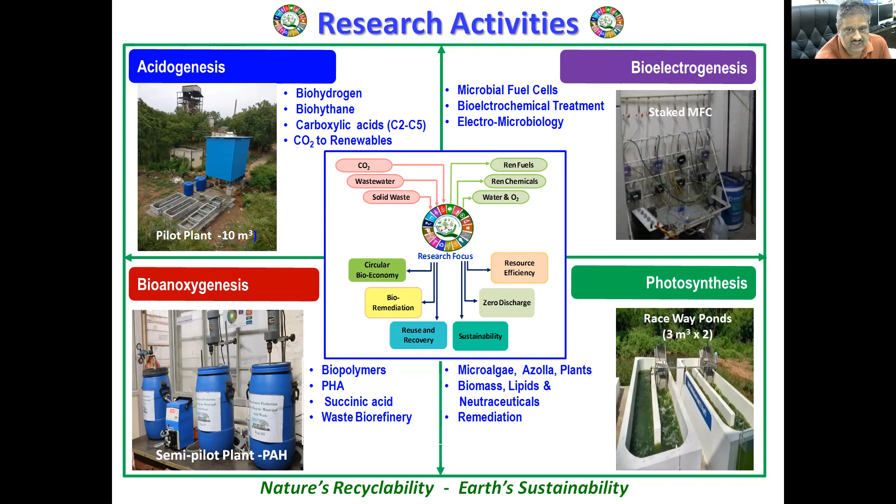Starting with some of the critical issues with respect to linear economy, that is fossil-based linear economy, I would like to show some figures. We are highly dependent on fossil resources for our energy requirement as well as for our material requirement. Whatever material is used right now is also mostly sourced from fossil-based resources.

When we look into the domestic material consumption as per 2010 figures, about 40 billion tons per year is being used, which accounts for 5 to 27 tons per person per year in a linear economy mode. By 2050, the population will increase to 10 billion from 7.8 billion right now, wherein India contributes 18% of the global population. We'll have domestic material consumption estimated between 90 to 180 billion tons per year, accounting for 8 to 17 tons per person per year.

So there's a great demand for resources, but resources are finite in nature. If we continue to live and produce like today, by 2050 we will need 3 times more resources, 50% more fuel, 70% more food, feed and fiber, as well as 50% more water.

Adding to this, 70% of the population lives in cities. Urban cities are responsible for 80% of GDP, even though they take up only 2% of the global area. But 70% of the population will live there by 2050, which is a critical issue, accounting for 75% of natural resource consumption and responsible for 70% of global carbon emissions, which is very critical.

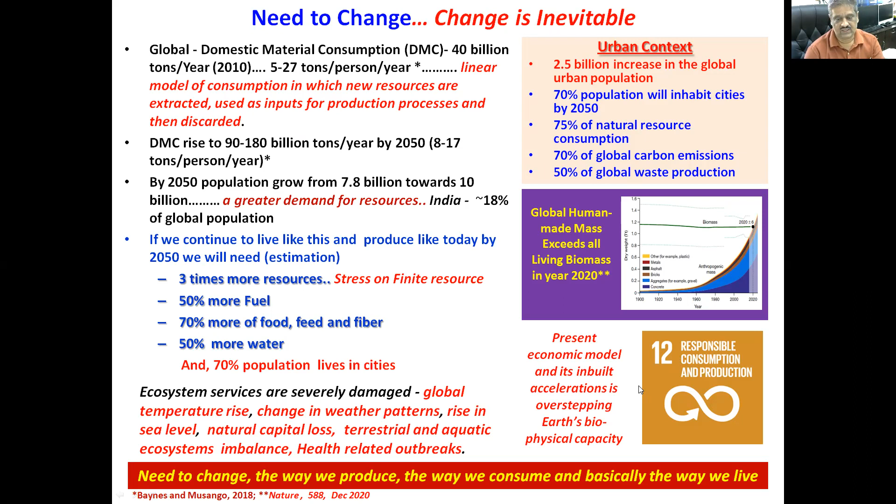Recently in Nature, they published a critical finding: global human-made mass exceeded all living biomass in the 6th month of 2020, which is very critical and disturbs ecological balance as well as ecological services significantly. This tells us that we have to move towards something sustainable, with resources managed in a sustainable way, which Sustainable Development Goal 12 describes as responsible consumption and production.

So here I would like to mention again that we are in a linear economy, which is a cradle-to-grave approach, a very industrial extractive model we've been practicing for the past 200 years: take, make, use, and dispose. According to estimates in the European Union, per capita use is about 15 tons of resources per year, of which 5 tons becomes waste, and 60% of that goes to landfills.

This shows that waste still has resources to be used, but we are throwing it away. It's a very significant issue, so we have to move towards sustainability.

So transition from linear to circular economy is a very significant way to approach the self-regenerative capacity of Mother Earth, so that ecological services can be retained.

It's a kind of cradle-to-cradle model, wherein material which we take from Mother Earth will be used in a process, and after its utility, the waste, as we call it right now, will become a resource for other processes. This way we can increase resource recovery efficiency and reduce material loss in the system.

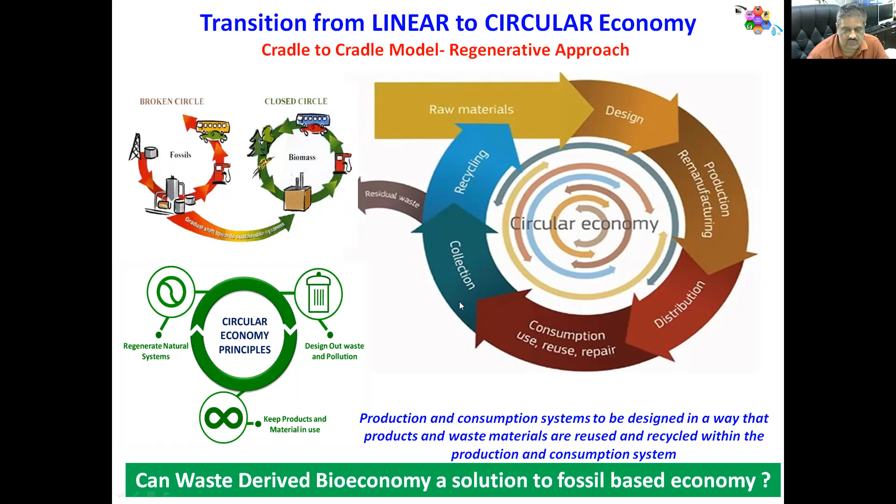So the goal is to maximize materials in the circular loop, reduce the loss, so that we depend less on fossil-based materials. This approach is coming up in a significant way. Here I would like to say that bio-based economy, particularly with respect to the circular loop approach, is very significant, because a regenerative natural system is very critical.

When we are trying to regenerate resources, very much similar to what nature is doing, it will have a regenerative capacity. So a circular regenerative approach is the order of the day, and it's one of the sustainable approaches.

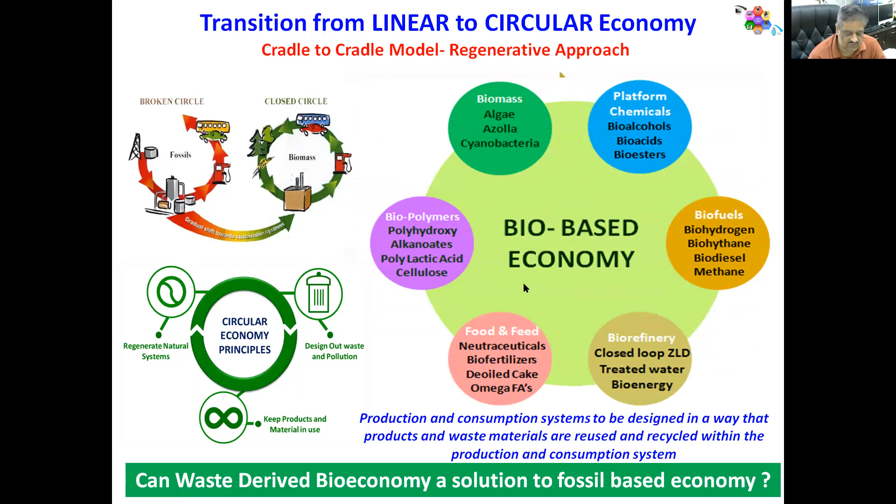When we talk about circular economy, waste is one of the important feedstocks. In India, we have significant amounts of waste, starting from municipal solid waste, sewage, fecal sludge, as well as industrial wastewater, which have inherent potential for energy generation, as well as potential to recover resources in the form of organic nutrients, chemicals, or many other things.

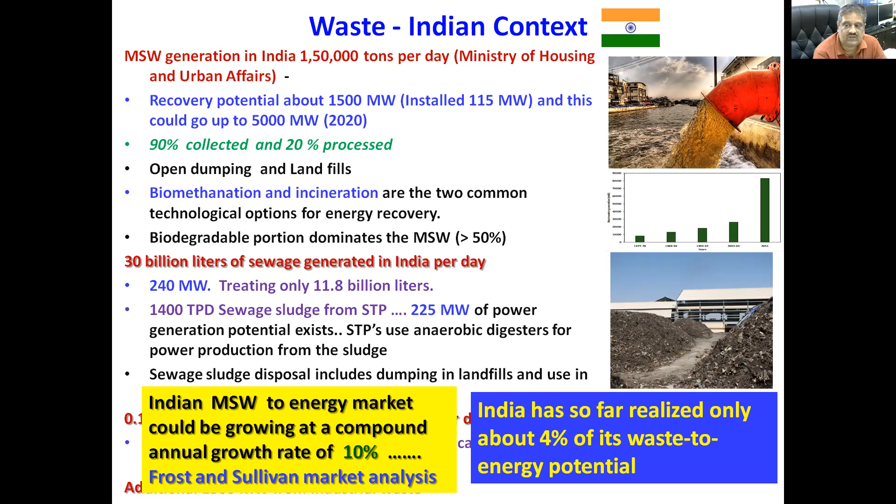However, at present we are only using 4% of the waste-to-energy potential. But according to estimates, there's about a 10% annual increment in municipal solid waste generation, which is very significant with respect to resource availability for sector-based bioeconomy.

So let me put forward some of the processes and some of the wastes which can be used by biological processes to convert into different products with different applications, which also accounts for waste remediation. This includes domestic wastewater, industrial wastewater, solid waste, as well as CO2.

CO2 can be used as a feedstock for biological processes, starting from anaerobic digestion, which is a mature process, to acidogenic fermentation. Likewise, many processes are available which need to be used to produce required materials that will have significant applications. This shows that circular approach as well as bioeconomy is very critical in order to recover resources from waste in a sustainable way.

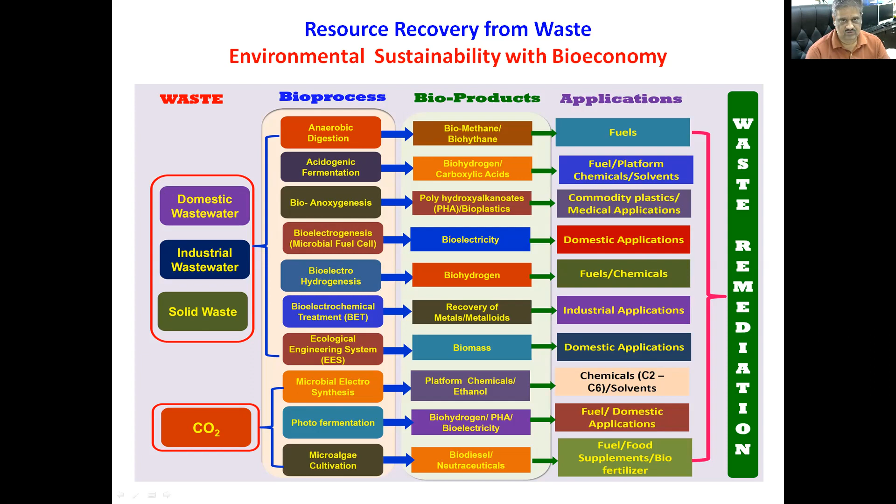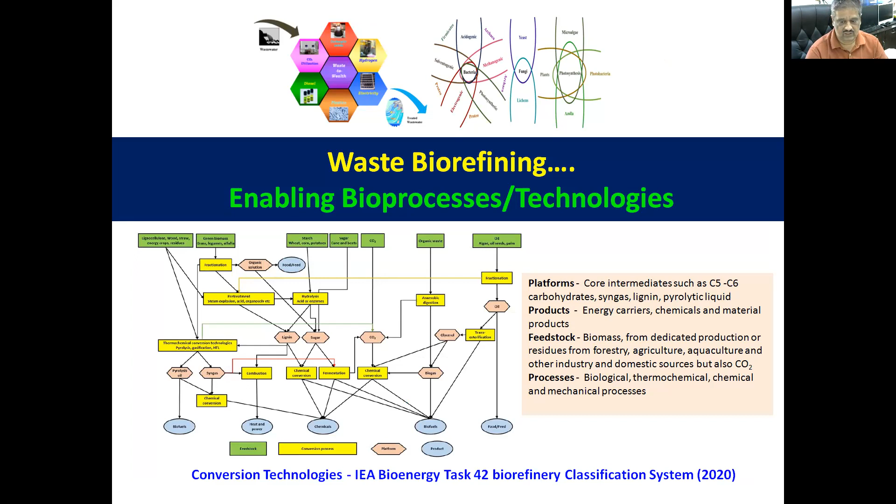For that to happen, we require system-enabling processes or technologies. I would like to call this waste biorefining process, in order to make this feasible and more of a reality.

Here I would like to mention again about the anaerobic microbiome, which is a very versatile biofactory, wherein when we give carbon in the form of six-carbon glucose, you can see the metabolic routes going towards different products, starting with methane, which is a mature and easy process, to hydrogen, plastics, lipids, lactic acid. It's a very versatile platform, and we can tweak the metabolic activity towards the requirement of the materials we anticipate.

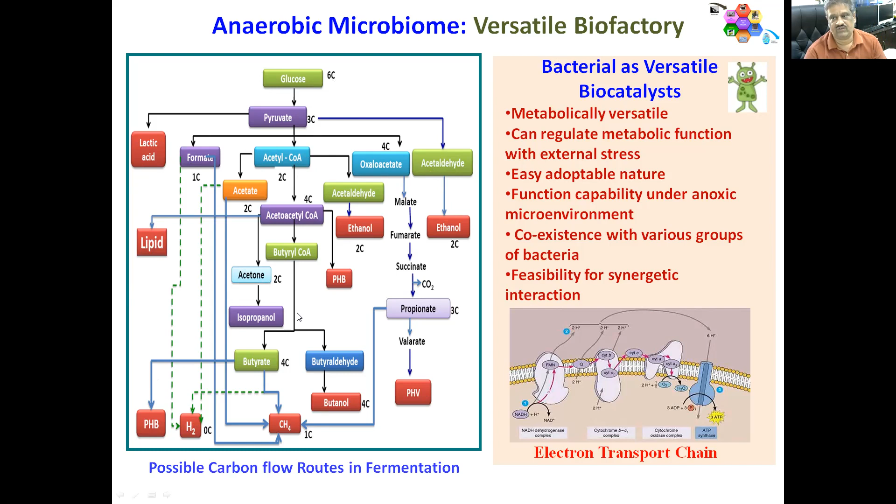So one important process I'd like to mention is dark fermentation, which is able to produce hydrogen as a terminal end product. Hydrogen production by dark fermentation using waste is considered to be a low-carbon as well as green process. Everybody knows that hydrogen is a unique clean energy source which will not generate any kind of emissions.

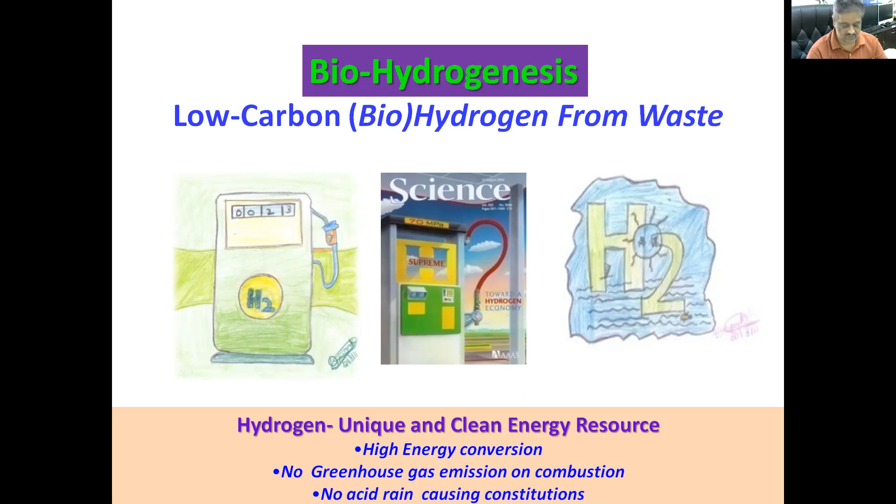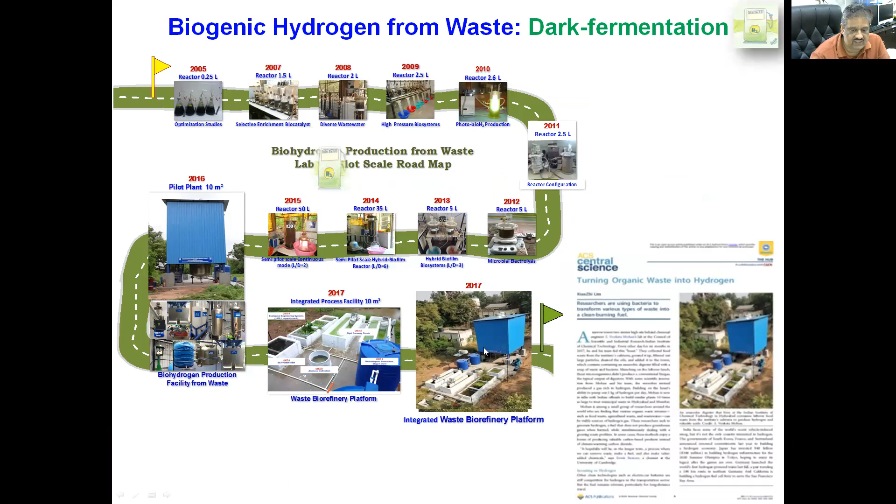In 2005, we started working on hydrogen production by taking waste as a feedstock. In 2016, we were able to set up a pilot plant with funding from MNRE, and then we were able to make a waste biorefinery facility integrating hydrogen to maximize resource recovery with funding from CSIR.

Hydrogen production is very much similar to the methanogenesis process, wherein four steps are involved. But in hydrogen production, we have to terminate the last step, where hydrogen and acetate along with CO2 would otherwise be converted to methane. So stopping the final methanogenic process and making hydrogen the terminal end product is the basic scope of dark fermentation towards hydrogen production.

In this process, 1 mole of glucose can produce about 2 moles of acetic acid, apart from 4 moles of hydrogen. And in the butyric acid pathway, with 1 mole we can produce 2 moles of hydrogen.

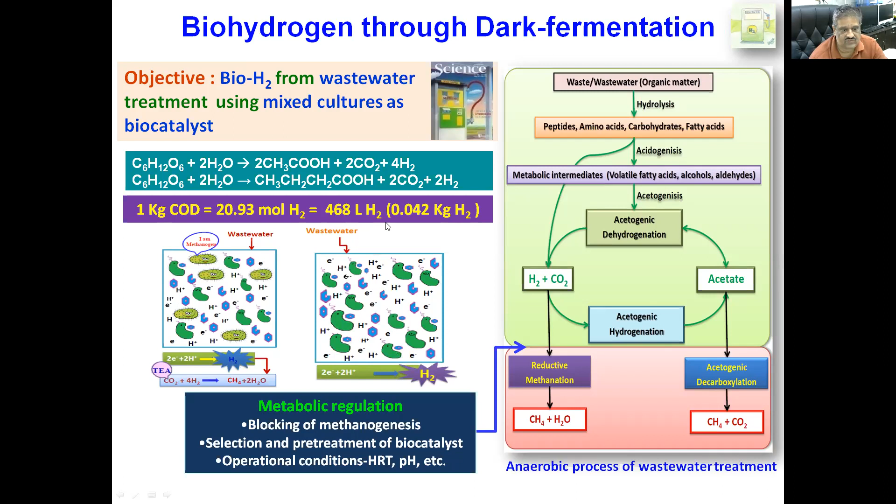When we account for waste, 1 kg of COD, if removed via the acetic acid pathway, can produce about 468 liters of hydrogen. We studied different wastewaters and were able to produce good amounts of hydrogen, apart from very good COD removal efficiency.

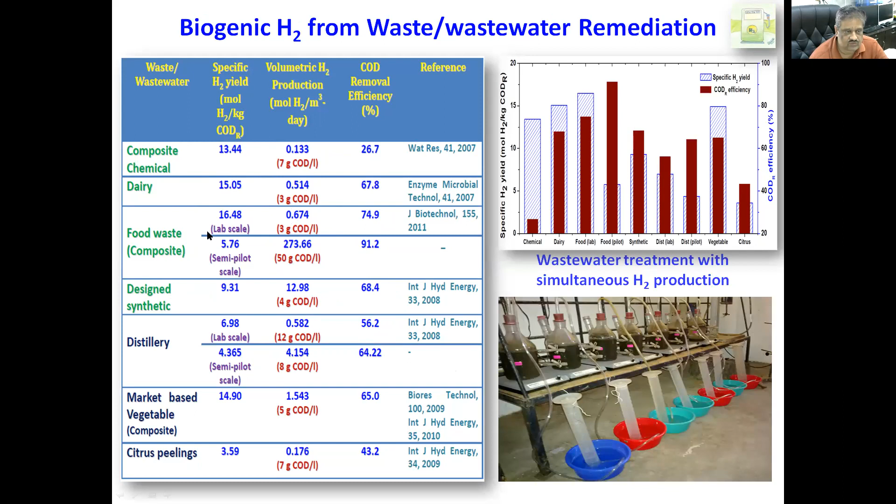But hydrogen production efficiency varies based on wastewater composition, organic loading rate, and biodegradable nature. However, when we look into hydrogen production during scaling up, we observed there are some inherent limitations or challenges which we need to address.

The basic one is with reference to the biocatalyst. When we are using a mixed culture, there will always be a possibility of methane production because methanogenic bacteria are present. So that's a critical issue while scaling up the process.

Apart from that, the feedstock composition, biodegradability, carbon load, and availability play a major role. There's also process inhibition, which happens due to the formation of fatty acids that give feedback inhibition, and this acidic redox condition will reduce process efficiency.

The other major issue is that the outlet from the hydrogen reactor has rich acids, which will be a critical issue if we are not treating it before disposing of it. So resource recovery is a major consideration here.

These are the critical issues we try to solve before scaling up our process to pilot scale. The major thing is with respect to selective enrichment of acidogenic bacteria, which is one of the critical things to produce hydrogen as a final product.

For this, we try to use some classical microbial techniques wherein the spore-forming bacteria, which is nothing but acidogenic bacteria that can produce hydrogen, can be made to sporulate by giving shocks such as acid shock, alkaline shock, or heat shock. But methanogenic bacteria, which are non-spore-forming, can be eliminated by giving these shocks.

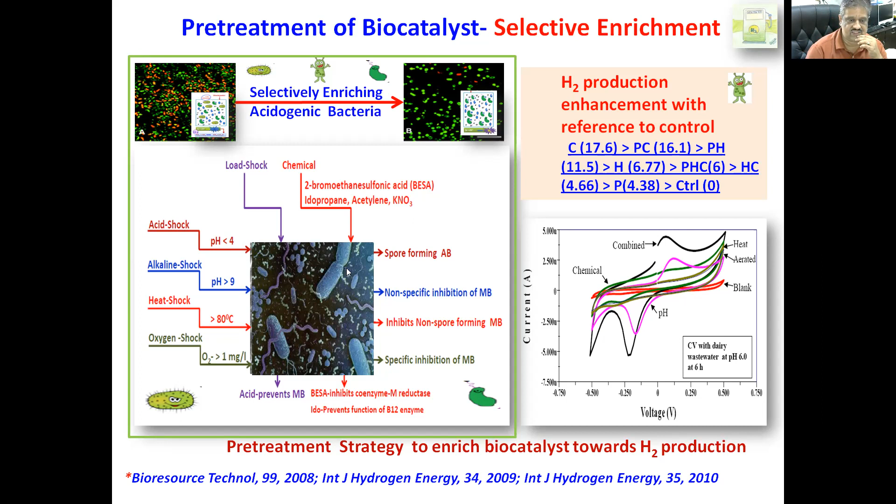This has helped us, and we tried to optimize this for almost 1 year in different reactors using different pretreatment methods. At the end of 1 year, we observed that all the systems had shown enrichment of acidogenic bacteria, particularly firmicutes, which are hydrogen producing bacteria.

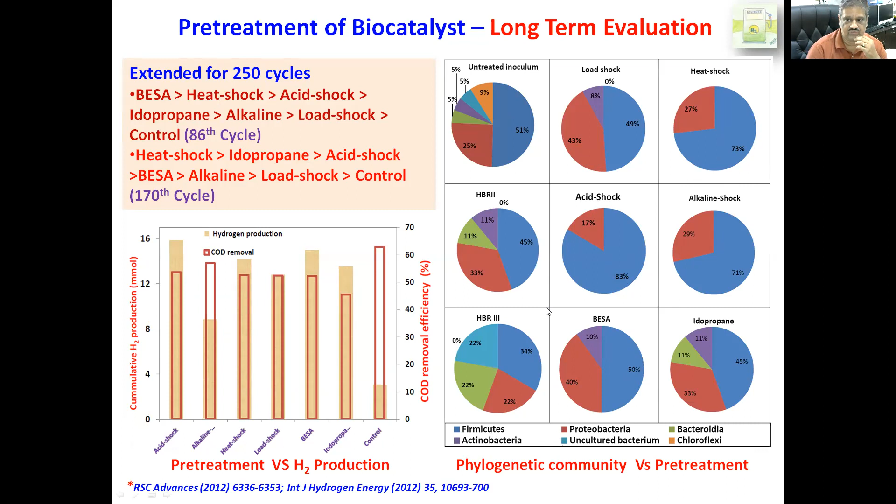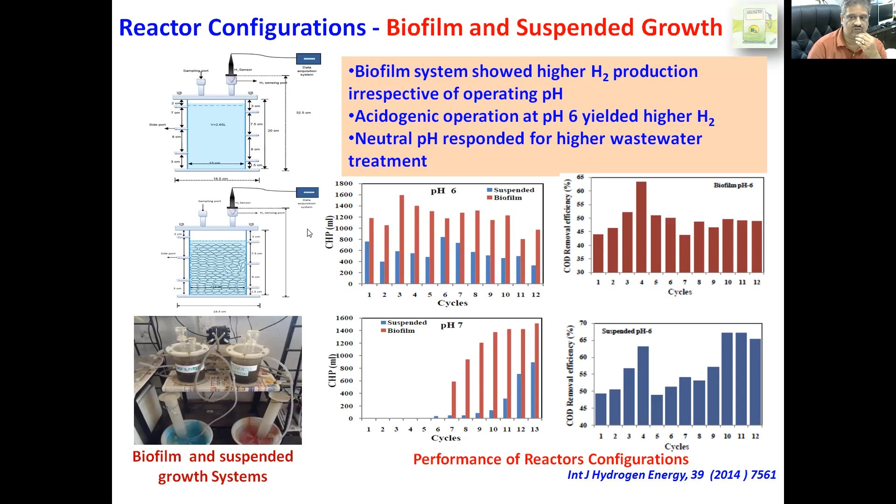So then we tried to optimize reactor configuration, but particularly suspended growth systems are not feasible for hydrogen production. However, biofilm systems are robust and can sustain the attachment of acidogenic bacteria in the form of biofilm, so that has shown higher hydrogen production.

Apart from that, the more the organic loading rate, the more the hydrogen production. So we tried to study the functional role of organic concentration of wastewater, and observed that up to 50 grams of COD per liter, hydrogen production increased significantly, but dropped subsequently because of a drop in pH.

So then we tried to regulate the system buffering capacity using some classic and known techniques such as inorganic ions and feed replacement strategy, apart from CO2 sparging. This helped us, and this is the diversity which we have studied for almost 6 years.

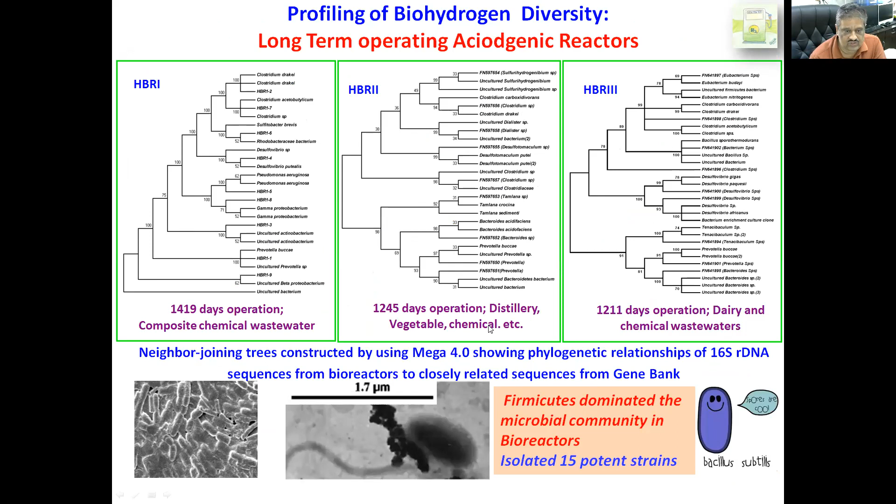At the end of that time, we observed that all the different reactors had shown enrichment of firmicutes, which are known hydrogen bacteria. These are the different bioreactors which we used to scale up the system and optimize parameters, particularly for dark fermentation towards production of hydrogen, wherein biocatalyst enrichment is very critical.

Acidic pH is more favorable for hydrogen production rather than methane, and the less the retention time, the more the hydrogen production, with no need to enhance the growth of methanogenic bacteria. Batch systems are more feasible towards higher hydrogen production, and biofilm configurations are very specifically required for robust acidogenic bacteria.

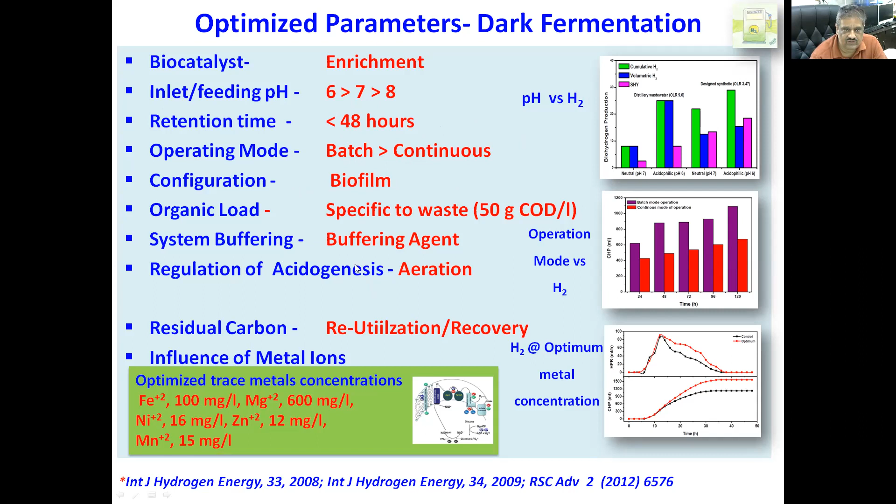Like that, we tried to optimize different conditions in order to maximize hydrogen production. Apart from that, with the funding of MNRE, we tried to develop a pilot plant with 10 meter cube capacity with all accessories that can selectively enrich the bacteria and pre-treat the solid waste if we are using it.

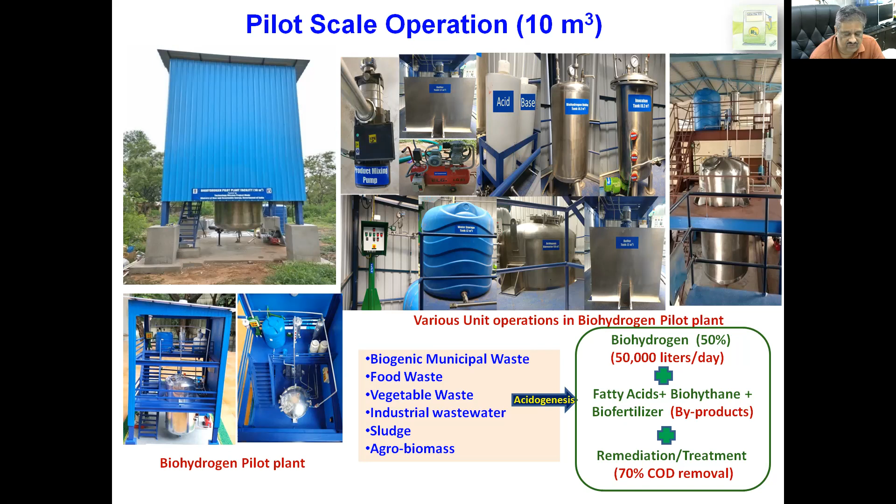So then, using municipal waste, particularly food waste, we tried to produce about 50,000 liters of hydrogen per day with 50% conversion efficiency by giving 50 grams of COD per liter.

So this is the unit cost of hydrogen per kg. At pilot scale, it's about 240, but at 100 meter cube capacity of reactor volume, it will be near 150, which is very much near to the market value.

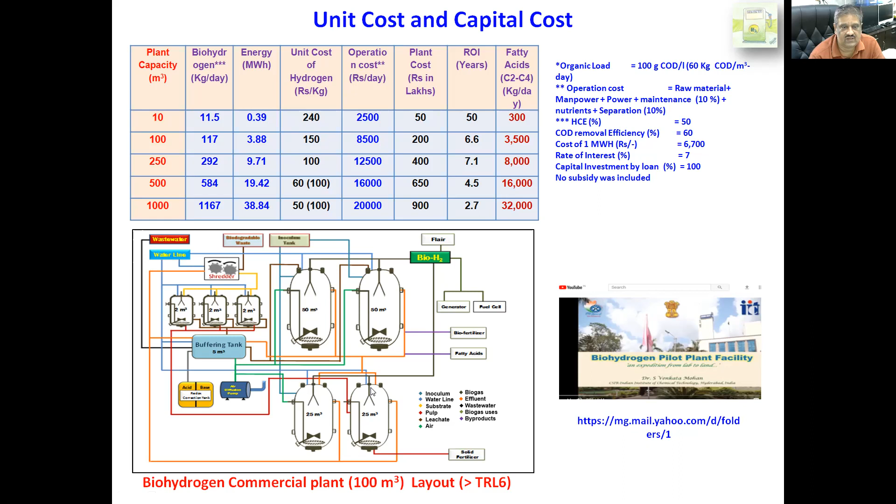So this is the commercial scale of hydrogen production with 100 meter cube capacity, which we have given to some industry. So while looking into the streams, the wastewater coming from the hydrogen reactor after treatment, we observed it still has significant potential. 50% of carbon is available in the wastewater.

So then we tried to integrate with secondary processes, different processes, to maximize resource recovery in a biorefinery format. Like the outlet from the hydrogen reactor, we have given to a microbial electrolysis cell, where we can produce hydrogen, and also an anaerobic process, where methane can be produced.

Apart from that, we also tried to study integration of anoxic systems where bioplastics can be produced. Our outlet can be used for organic farming, or for microalgae cultivation for biodiesel production with mixotrophic mode of cultivation, or with microbial fuel cell, the fatty acids will convert into energy. Photofermentation takes fatty acids and produces hydrogen.

So in two ways of integration, we can recover two forms of energy, or one form of energy, or one form of material, apart from 90% carbon conversion efficiency.

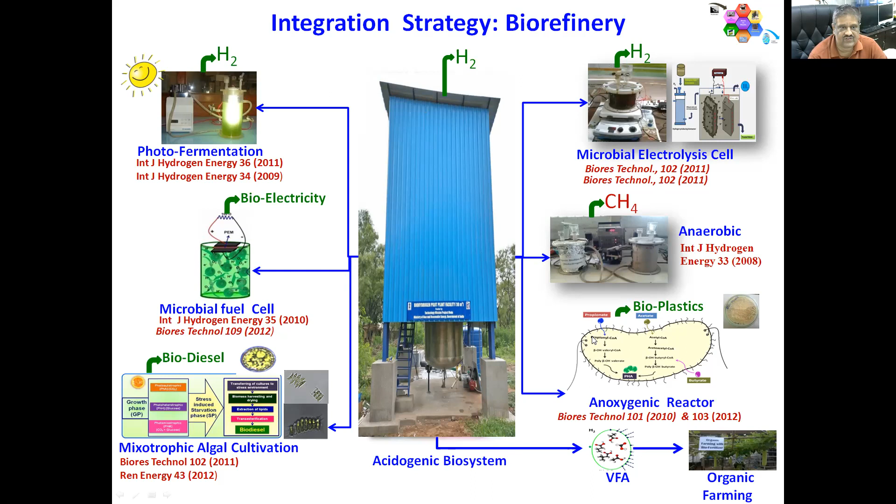So an important thing here is about HCNG, which the government of India is encouraging. When we supplement less than 20% of hydrogen, near to 18%, to compressed natural gas as HCNG, that will have significant potential and environmental benefits, reducing emissions, and it can use the same infrastructure which is available right now.

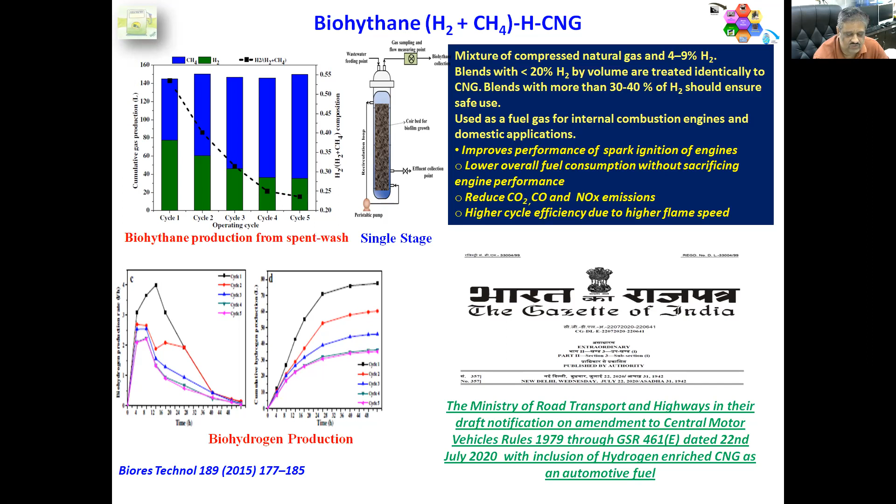So by way of integration of two reactors, one with acidogenesis and methanogenesis, or in a single reactor with optimum conditions, we can produce hydrogen and methane at required concentrations.

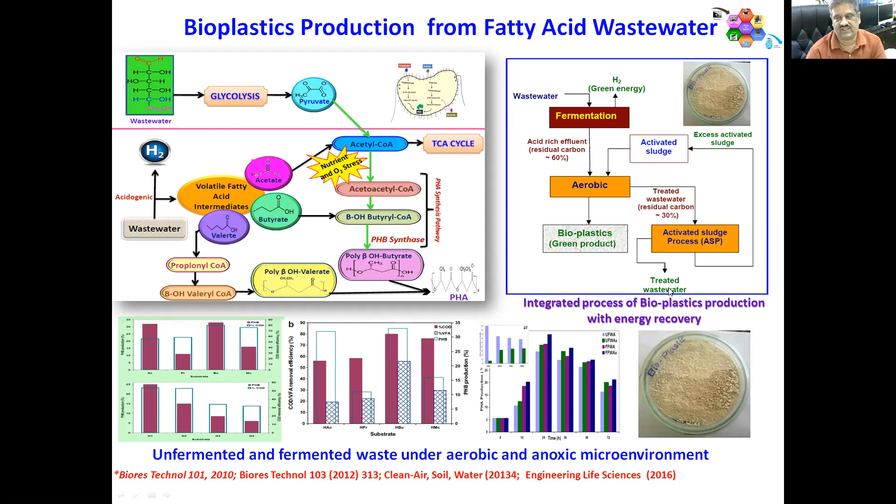As I told, the bioplastic production, which is a very important material that has good medical applications: by integrating with aerobic bacteria, by giving stress under anoxic conditions, that can produce biopolymers in the form of polyhydroxyalkanoate, or this can be used as a phosphate solubilizing agent by 10% supplementation during farming.

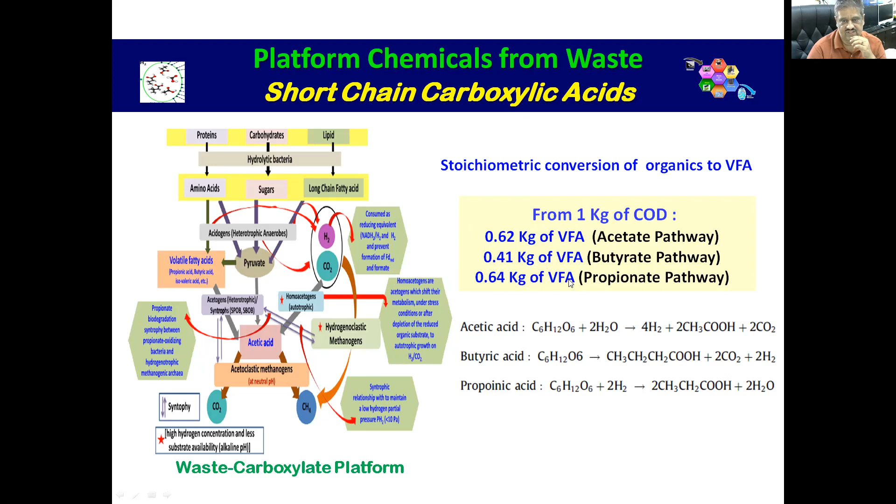So another important thing which right now is much discussed is production of fatty acids from the hydrogen production reactor, where from 1 kg of COD we can produce about 0.62 kg of VFA in the form of acetate, or 0.41 kg of VFA as butyrate, which are very critical platform chemicals that at present we are getting from fossil sources. This area is also coming up, so it's a win-win situation where we can produce hydrogen as well as fatty acids. Both will have significant economic value.

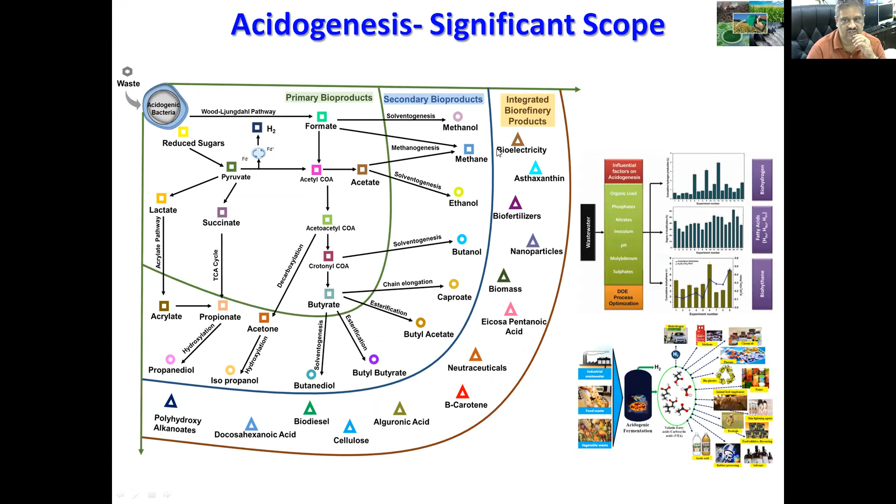Likewise, acidogenesis or dark fermentation has significant potential in the primary process, or by integrating in the secondary or a third integration in a biorefinery approach. We can extract resources in a significant way.

There is significant scope. Coming to the second process, microbial electrochemical technology, which is also known as a microbial fuel cell, is a significant platform technology which emerged particularly during 2005. In the system, we can use the same bacteria and same wastewater by putting an anode and cathode assembly, separated by a proton exchange membrane. The same bacteria can produce protons and electrons apart from CO2. The proton will pass through the proton exchange membrane, and the electron passes through the anode to the resistor and enters the cathode. In the presence of oxygen, it will form H2O, which will create a cell EMF that is nothing but electricity.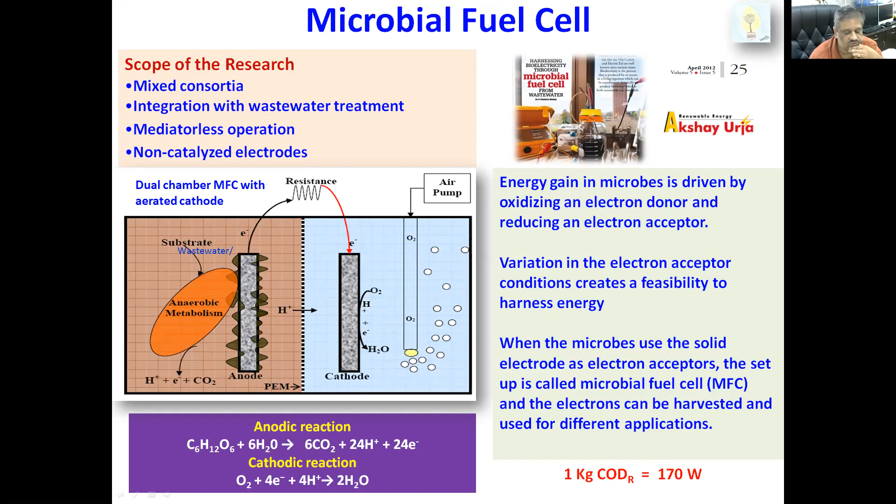So 1 mole of glucose can produce 24 moles of protons and 24 electrons, and 1 kg of COD will be able to produce about 170 watts of energy. But at present, practically we are producing 20% of the theoretical energy. So during these 15 years, the microbial fuel cell has significantly diversified and has become one of the emerging platform technologies, particularly to maximize resource recovery from any kind of waste, or towards integrating in a biorefinery approach to maximize the resource recovery aspects.

So it can take any kind of wastewater, from domestic to industrial wastewater, or fermentation effluent, or it can take CO2 or syngas or saline wastewater. If we want power, it can be called an MFC, but subsequently it can be renamed bioelectrochemical treatment when we are only interested in treatment, or a bioelectrochemical system where we can produce hydrogen, or we can produce platform chemicals by using CO2 or some other organic source.

A microbial electrolysis cell can produce hydrogen with a little input of energy. A desalination cell can produce treated water by segregating the saline content of the wastewater. So it emerged as a significant emerging technology during these 15 years.

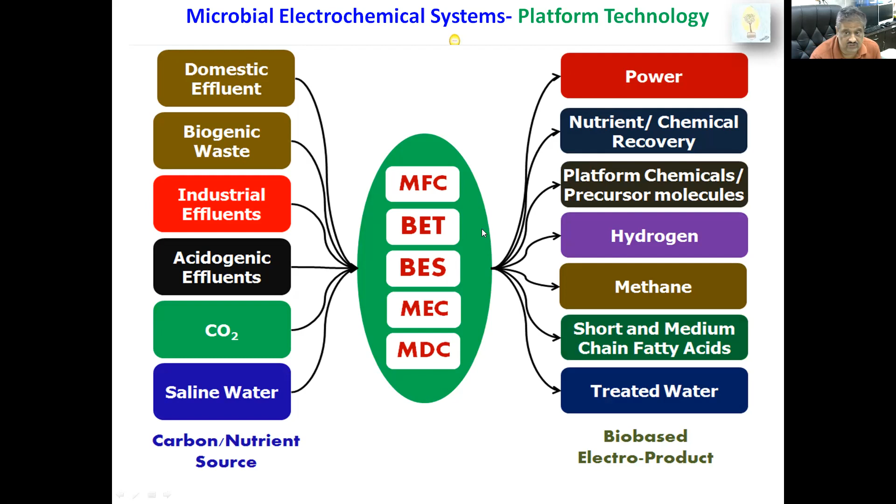So coming to wastewater treatment, particularly power generation, we tried initially with power production and optimized the reactor conditions. We have developed low-cost microbial fuel cells with non-catalyzed electrodes that can produce a significant amount of power apart from wastewater treatment.

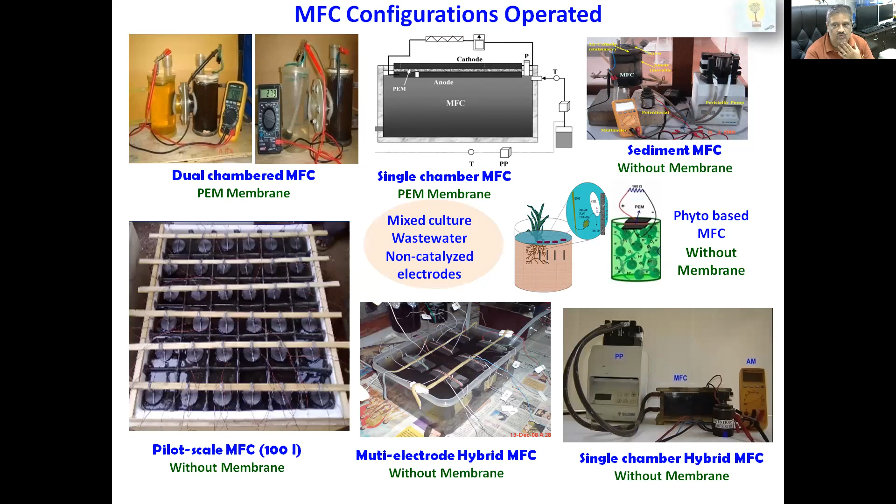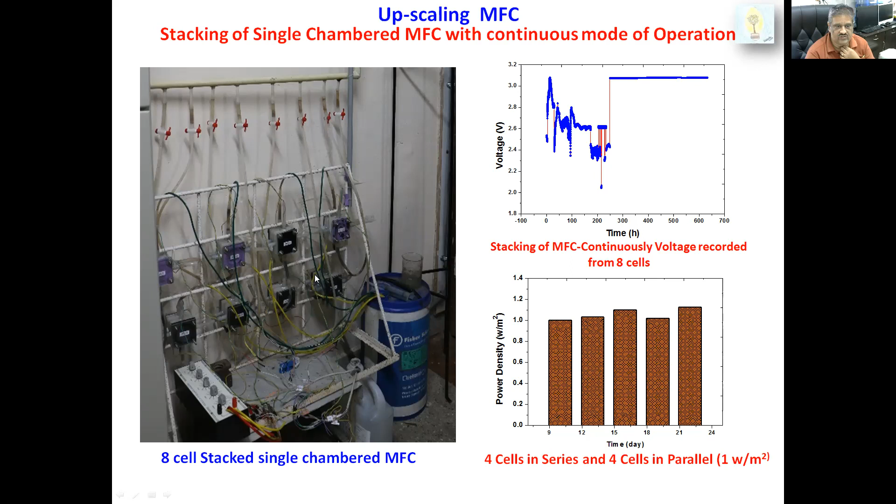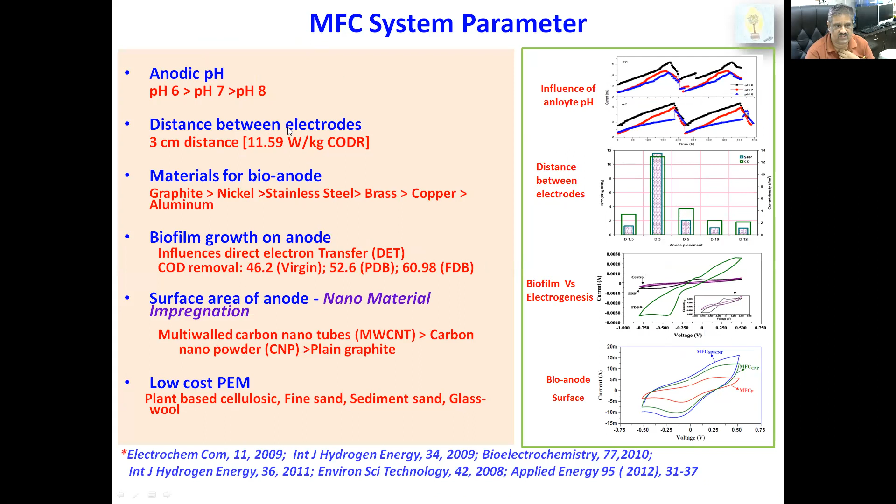This is another version of a fuel cell system, a stacking system, which we have developed within a project, the New INDIGO project, that can produce 1 watt per meter square with domestic wastewater, and different other configurations which I will not go into deeply, but some of the optimum conditions, particularly for power generation, are listed here with respect to distance between electrodes, materials and pH.

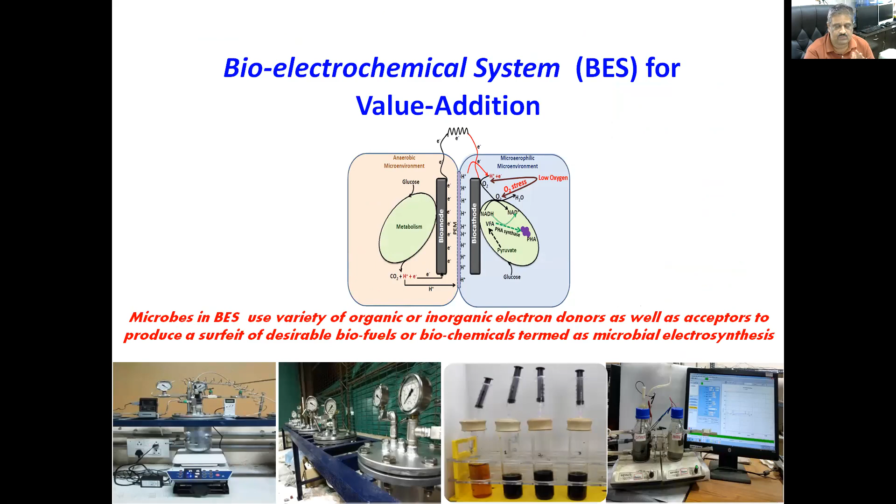But the most important process, particularly with respect to MFC diversification, is the bioelectrochemical system for biorefinery. So here I would like to explain a little bit on this and different aspects. Particularly, we can use this MFC system or bioelectrochemical system as a pre-treatment system towards reducing the complexity of any wastewater before going to either the biomethanogenesis process or dark fermentation process or any fermentation process. This will increase the productivity in the secondary reactor by reducing the complexities.

Here you can see when we integrated with the hydrogen reactor: before the integration, in a single step, the hydrogen production was about 600 ml, but by integrating the system with pre-treatment, we are able to produce near to 1000; more than 50% increment in hydrogen production was observed.

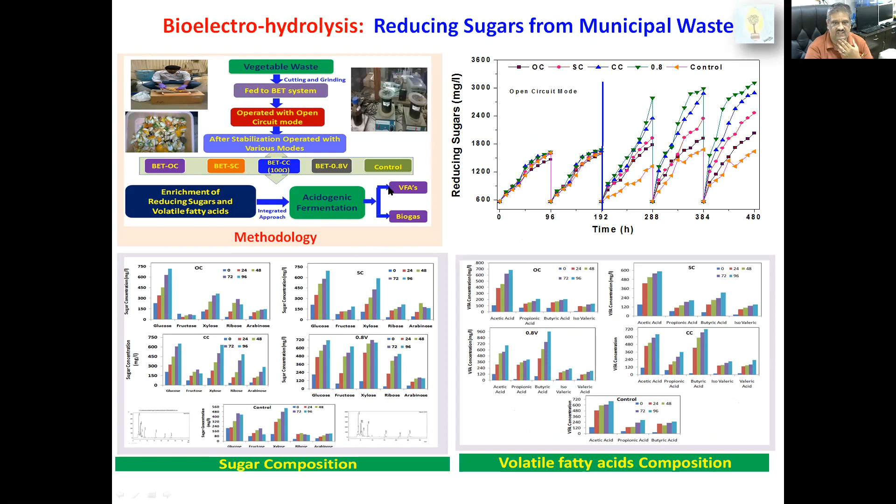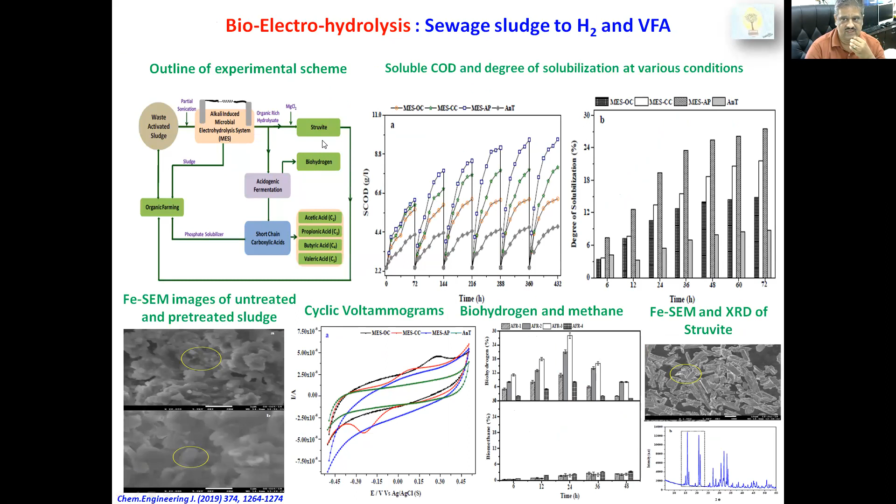Similarly, we can integrate it as a pre-treatment system for domestic waste and solid waste, which increases fatty acid production that is subsequently used for acidogenic fermentation, or used for sewage sludge, which can subsequently increase hydrogen production, apart from extracting struvite.

Or in a microbial electrolysis cell, where with a little applied potential we can produce hydrogen, or in electrofermentation, which is an emerging technology where we can regulate the metabolic process, the fermentation process, towards the product which we require, or towards increasing the productivity of any specific kind of process, like we have used for fatty acid production, where the increment in fatty acid was more than 50%, apart from hydrogen production.

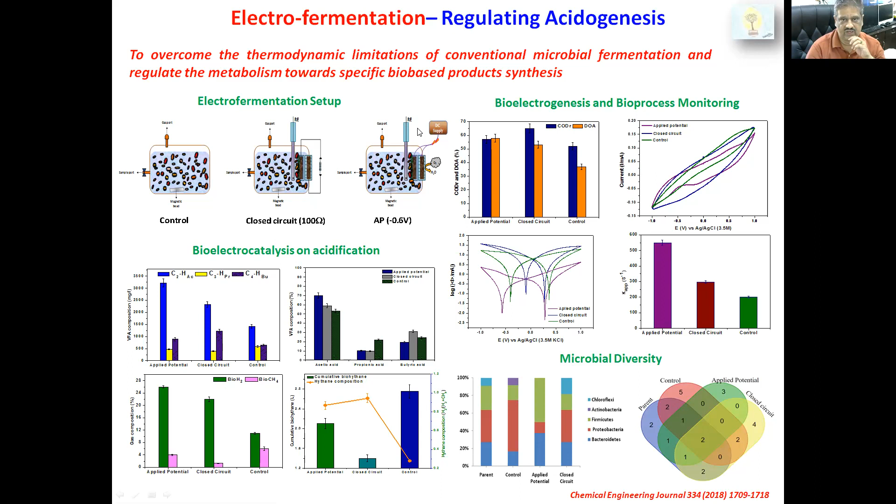And another important application is biogas upgradation, where the methanogenesis process has its own limitations, wherein 55 to 60% methane is produced apart from CO2, but by a set of defined electrode assembly, we can increase the methane content of the biogas as well as reduce the CO2 by converting it into methane by syntrophic association of electrode and a specific group of bacteria. Apart from that, we can also increase the total biogas production. So this biogas upgradation is also coming in a big way by taking advantage of the direct electron transfer mechanism.

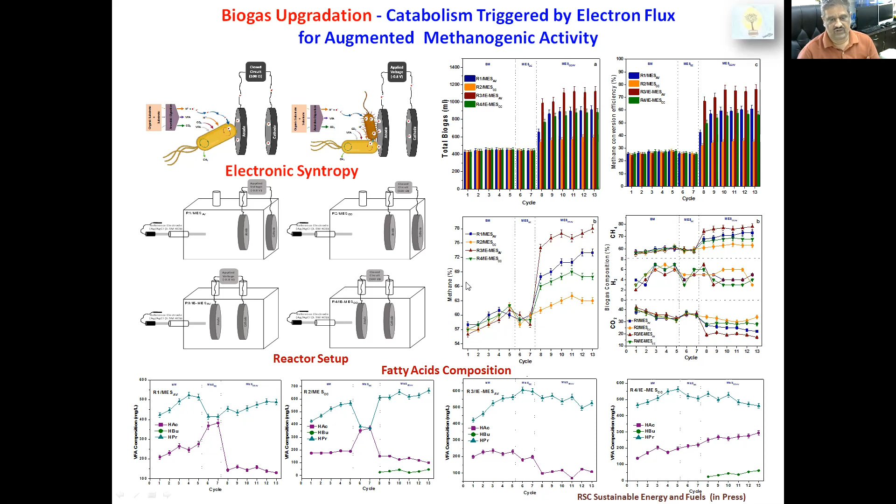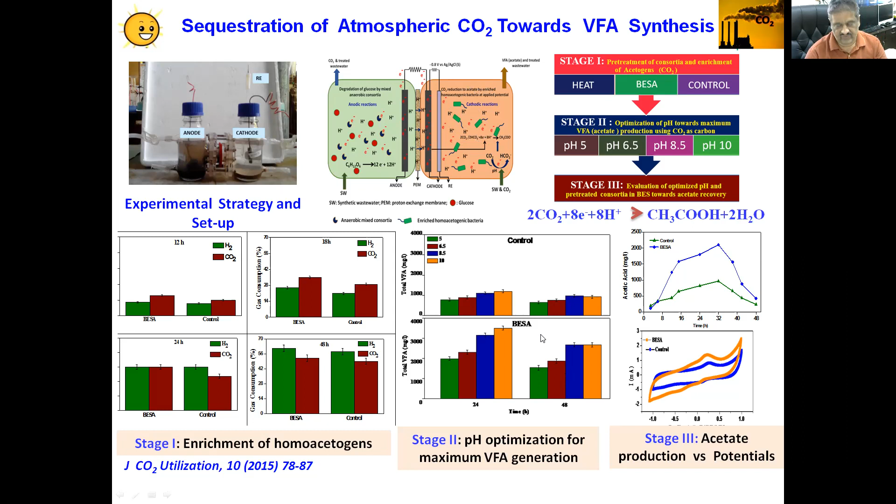So another last application which is very critical is CO2 sequestration. A microbial electrochemical system in a defined electrode assembly at the cathode can convert CO2 into fatty acids by using homoacetogenic bacteria, which is one of the emerging areas. So here the productivity increment is very critical. So CO2 directly towards fatty acids is an important entity, and these fatty acids can be subsequently converted into different finer chemicals or some kind of fuels like ethanol.

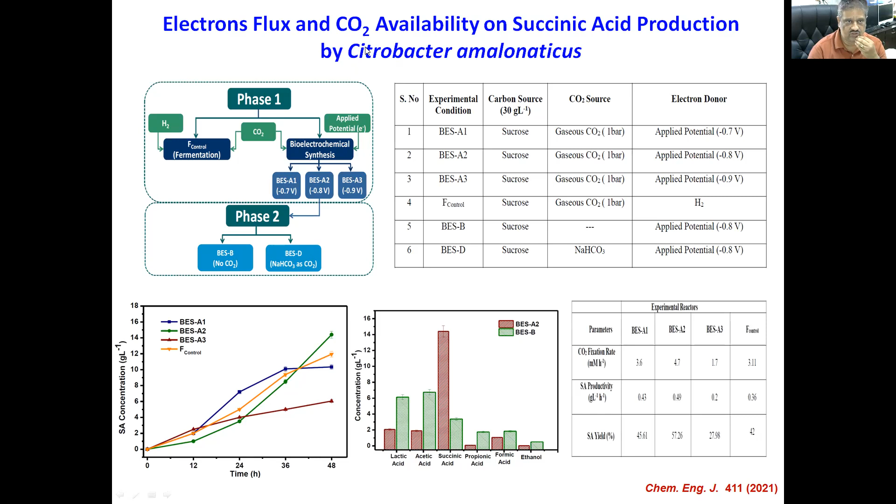So we are trying to look into production of succinic acid, a high value compound, by sequestering CO2 in a defined fuel cell assembly by giving a little input of energy by a specific bacteria, Citrobacter amalonaticus, by giving a waste carbon source. This is helping to increase the chain elongation from acetic acid towards succinic acid by utilizing CO2. This area is also one of the important areas which is emerging.

And we are also working on gas fermentation here to sequester CO2 from the acidogenic reactor, where about 40 to 55% of CO2 is also produced in hydrogen production by direct fermentation. So this is a practically viable process wherein by inputting a specific amount of gas pressure in the head space, we can use homoacetogenic bacteria to convert it into fatty acids by influxing some of the electron donor.

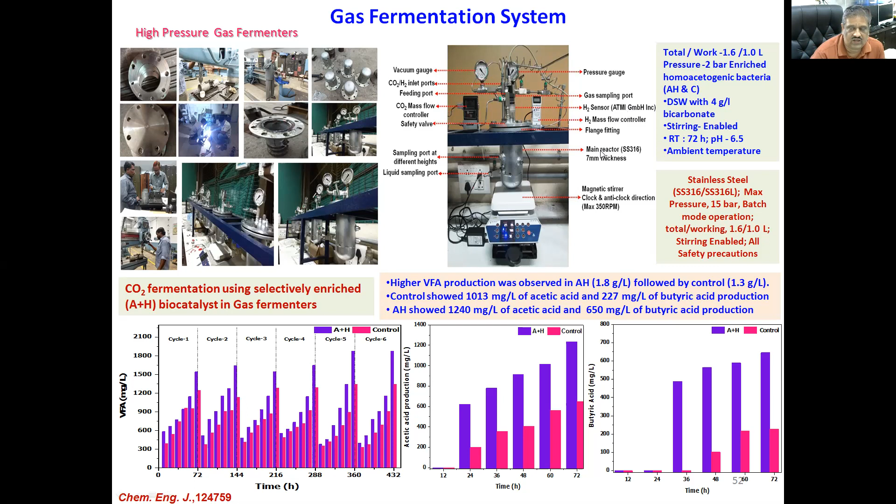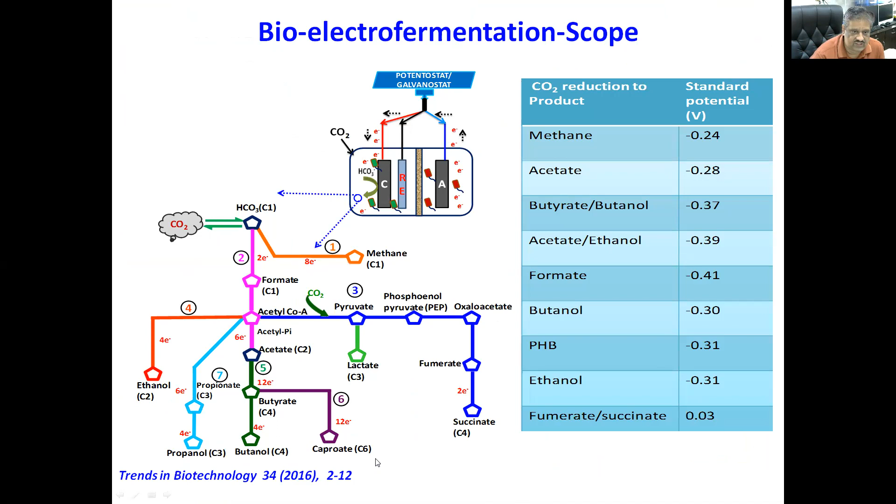We are trying to regulate the incremental increase of production of fatty acids by using some of the low cost electrodes, electron supply. So likewise, there is significant scope. I will not go into deep, but you can see that there are various products that can be produced from CO2 by using the electrofermentation route.

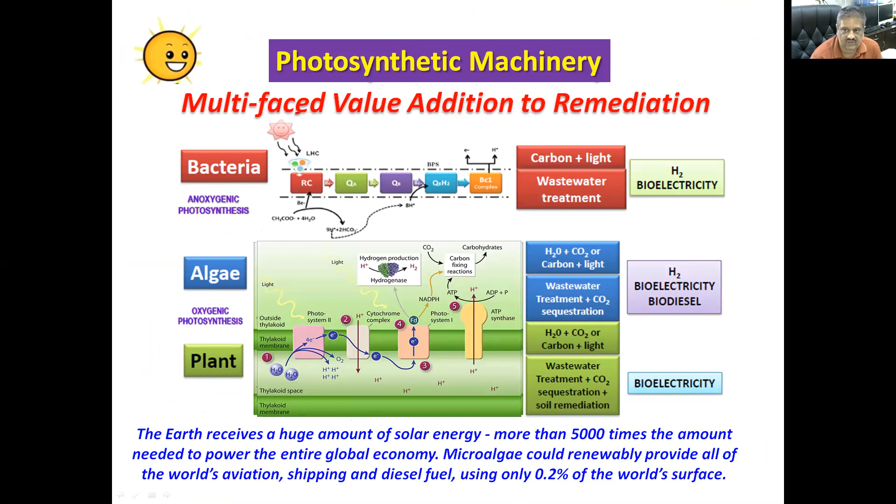The last process I would like to explain is on photosynthetic machinery, where everybody knows that photosynthesis is the main process on Earth where humans are dependent and surviving. So we try to use microalgae with two phases of operation, growth and stress phase, by mixotrophic mode, trying to use carbon from both the gaseous form as well as organic form from wastewater to convert it to biomass initially. Subsequently, by stress condition, it can be converted into lipids that will have biodiesel value.

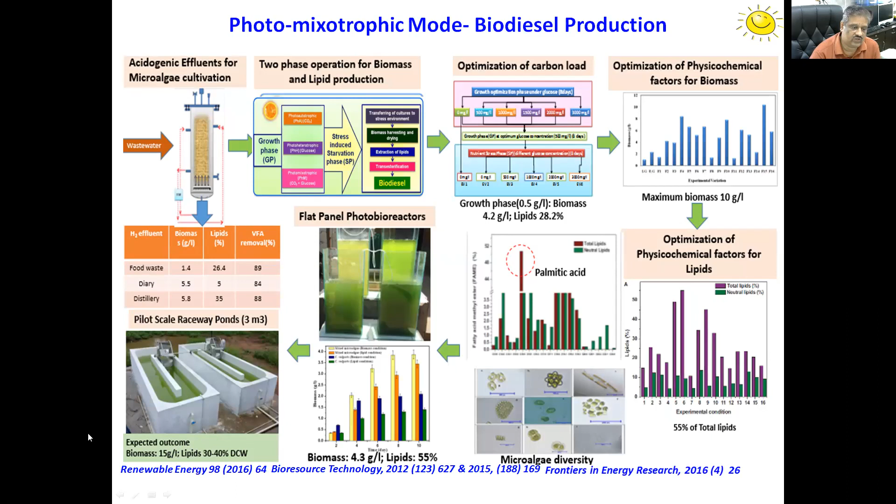So the basic objective of starting this process is to integrate with the hydrogen production reactor, where the outlet from the hydrogen reactor rich in fatty acids will be used for biomass production, subsequently for biodiesel production. This we are able to come up to pilot scale with 15 grams per liter of biomass production, apart from 30 to 40% lipid productivity. These are the two raceway ponds with 3000 liter capacity integrated with the hydrogen production process.

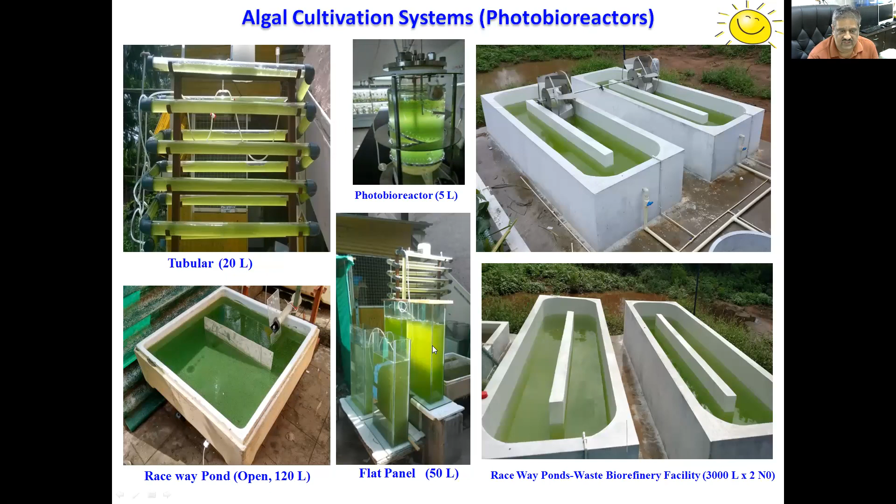Different photobioreactors which we try to optimize. It's a flat panel system which is more efficient. There's a photoreactor and raceway ponds of 3000 liter capacity. And CO2 sequestration, particularly with microalgae and other things, has significant potential to convert it into different value-added products.

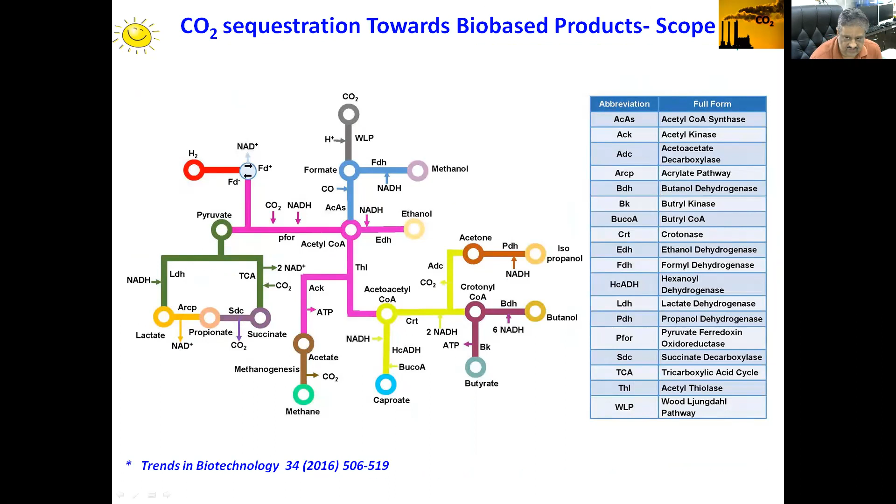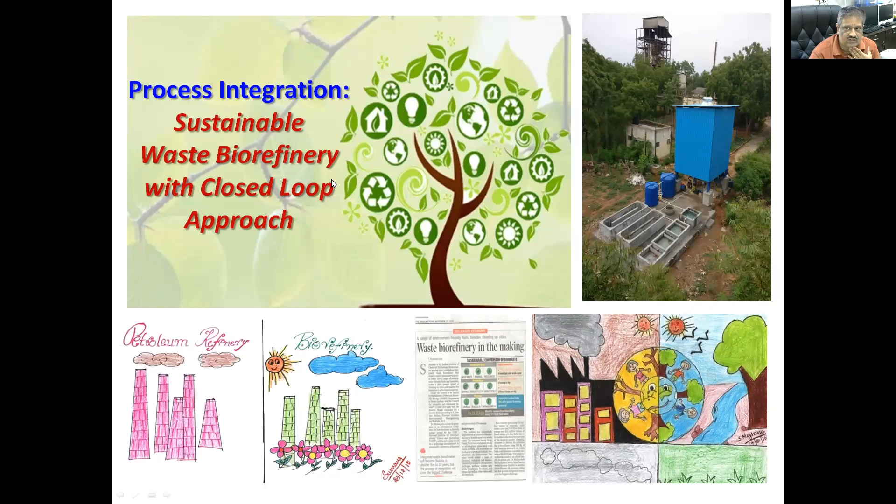So our basic objective is to try to integrate various processes in a biorefinery approach to close the loops. So we would like to call it the waste biorefinery facility, wherein similar to petrochemicals, where petroleum crude will be refined to different products, likewise, we consider waste as a crude, and we can convert it by integrating different biological and thermal processes. In a circular loop approach, we can also produce different kinds of products which will have significant applications.

Likewise, we try to develop a model in IICT, with CSR funding, by integrating hydrogen production, where we can take wastewater or waste, and waste needs to be pre-treated. Initially, it will go to a microbial fuel cell system, where it produces a little bit of electricity apart from reducing the complexity of wastewater, for the subsequent acidogenic process for hydrogen production, where 60 to 70% of carbon will be converted.

And the residual carbon will go for a third process, either photohydrogen, methanogenesis, or microbial fuel cell, algal cultivation, to produce a third form of product, either in the form of biofuel or some kind of chemicals. By this way of integrating three processes, we can reduce 90% of carbon or recover 90% of carbon.

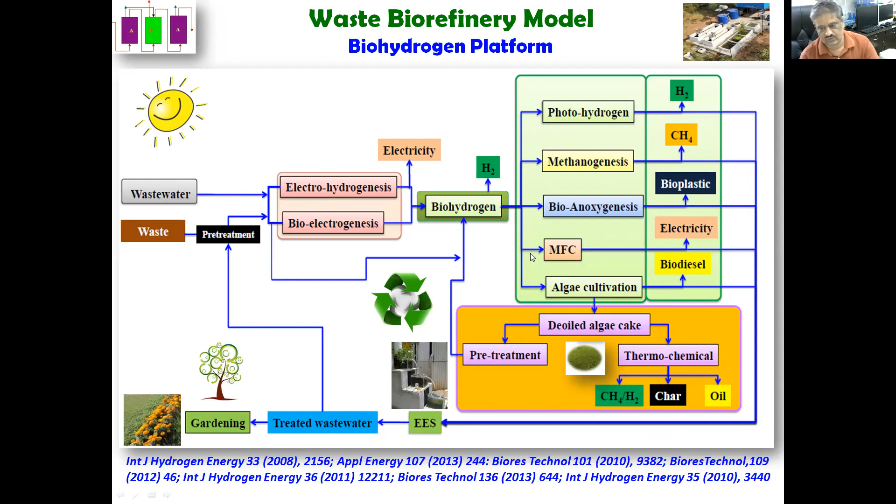10% carbon will be pre-treated at the terminal point and can be used in the process when we are using solid waste, or we can use it for gardening. So it's a kind of closing the loop and maximizing the resource recovery. This we have developed as a waste biorefinery platform in IICT, integrating the hydrogen production process, a closed loop of different unit operations, 10 meter cube capacity.

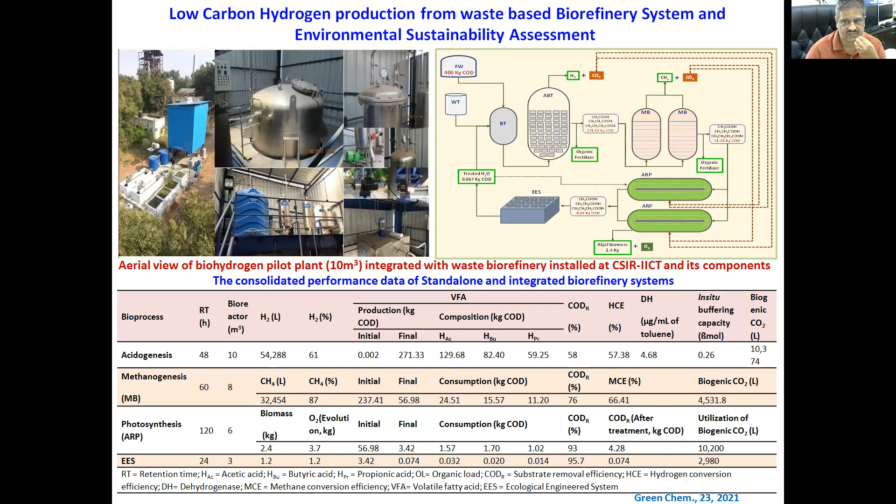So then we tried to study the sustainability of this process with respect to life cycle assessment, comparing to the existing process. And we observed that this is the process with hydrogen production alone. This is the process integrating the biorefinery approach, wherein all parameters with respect to 4 damage categories: resources, ecosystem, human health, and climate, are better with respect to the closed loop approach. And when compared to the conventional process which is right now being used, the biohydrogen production process is less impacting on human health as well as ecosystem quality compared to the other process.

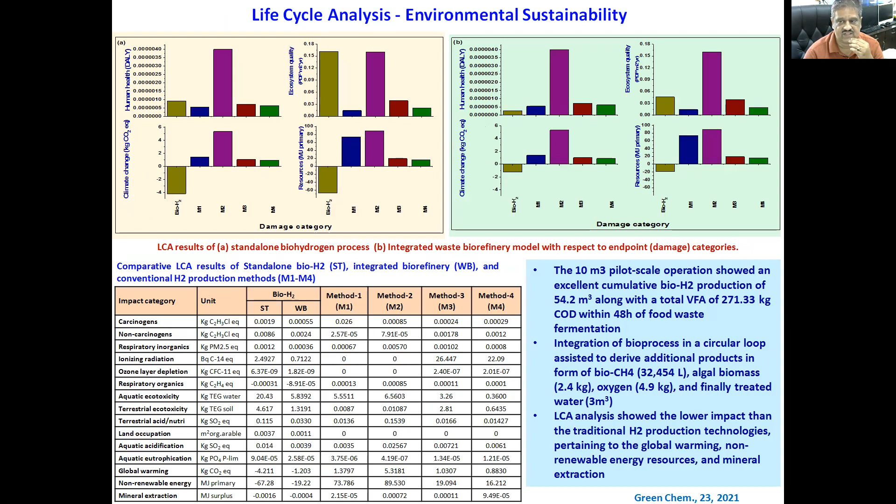Likewise, climate change also has a negative side because it's not using any resources, and for resources also, waste is only being used as a resource. So it says that this process has a sustainable entity and can be considered for integrating into the existing green infrastructure. So apart from these models, we are also trying to look into other waste biorefinery models.

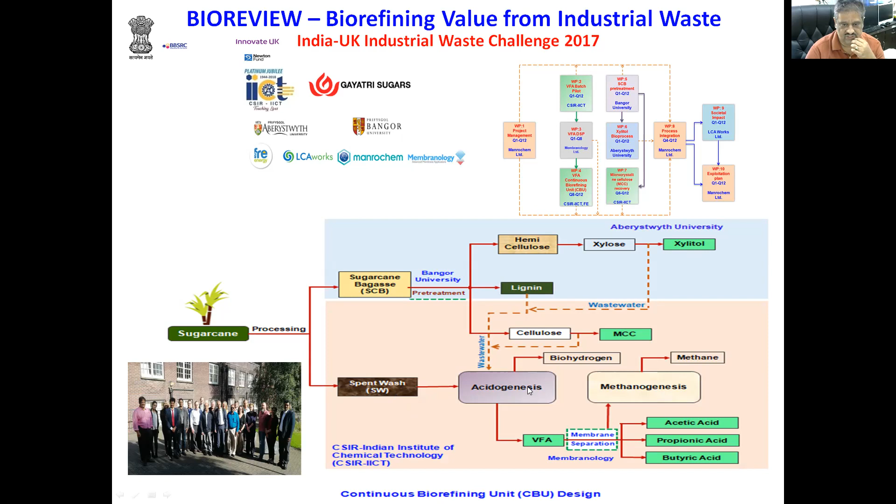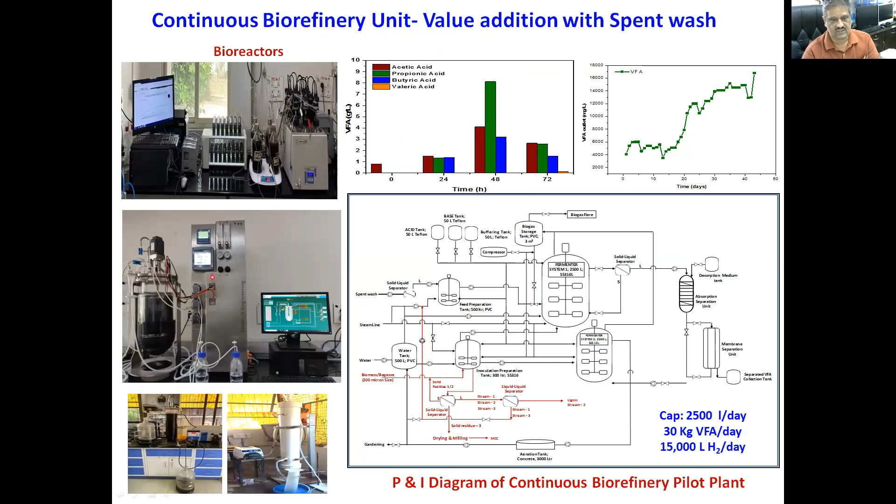In the Indo-UK Industrial Waste Challenge project, we are seeing the sugarcane industry as a potential source in order to make a refinery that can use 2 waste sources, such as sugarcane bagasse towards high-value products and spent wash towards acidogenesis, dark fermentation, hydrogen production, and fatty acids. This process, right now, we are trying to scale up by putting a pilot plant at site in Gayatri Sugars towards production of hydrogen as well as fatty acids. And this is another version where using bagasse, we are trying to produce some value-added chemicals, platform chemicals such as crystalline cellulose as well as nanocellulose, apart from xylitol.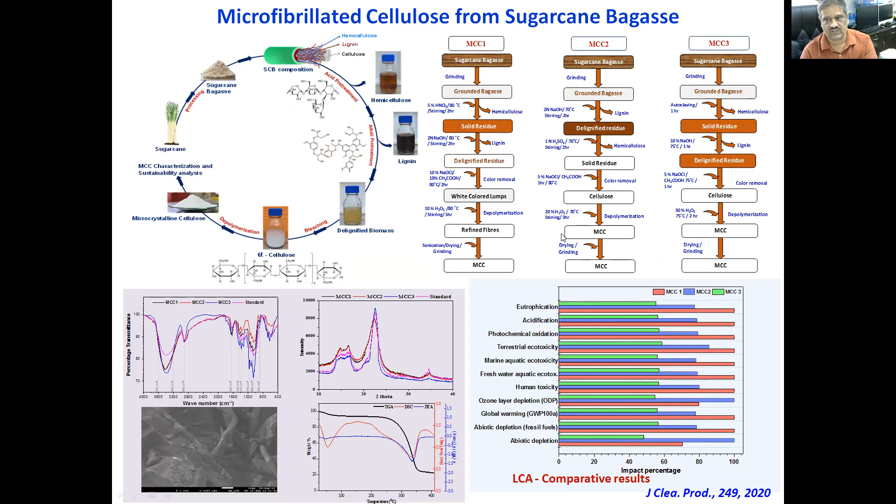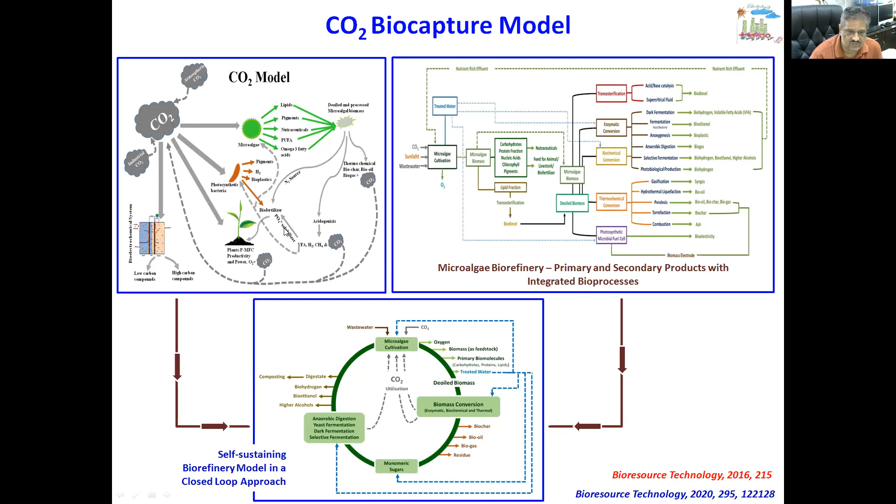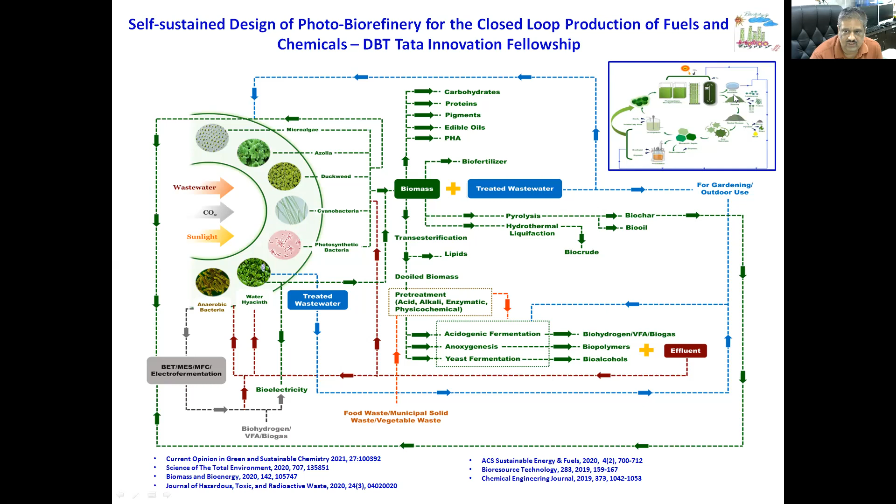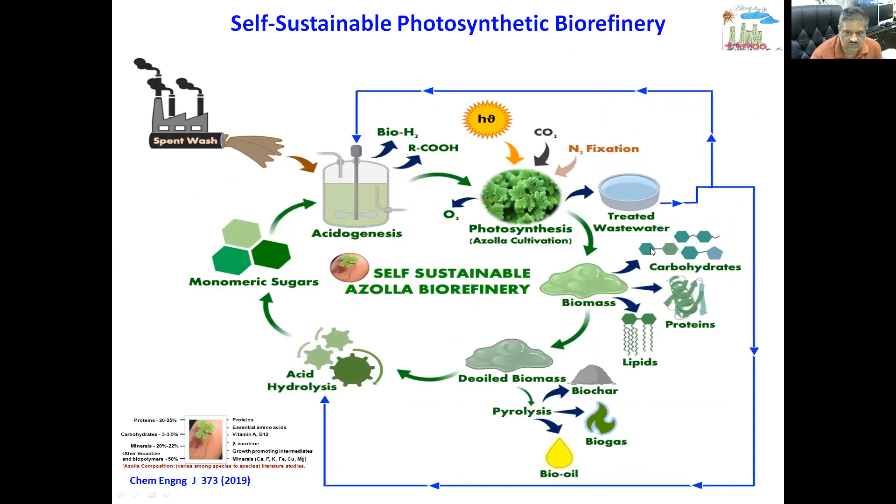So another model which right now we are very extensively studying is CO2 biocapture models in a biorefinery approach. We are majorly focusing on the photosynthetic mechanism as a primary part, where we can develop self-sustainable systems using microalgae or using Azolla or duckweed. So this approach we have developed for a DBT Tata Innovation Fellowship, different integration approaches that can take microalgae or Azolla as a feedstock and convert it to different products in a circular loop approach. This is a model which we have developed with microalgae towards a closed loop approach, producing multiple chemicals. And this is the self-sustainable photosynthetic model, with Azolla starting with wastewater treatment and then integrating different processes towards different resources in a circular loop approach.

These kinds of models we are also trying to develop for a DST Indo-Korean project, particularly towards developing an electrofermentation system by using the resources which are again coming from the photosynthetic process. Increasing the rate of electrofermentation is the major objective. These two circular loop approaches we are trying to integrate into the main loop in order to maximize the resource recovery without giving any inputs from external sources, but developing self-sustainable systems that can produce different chemicals.

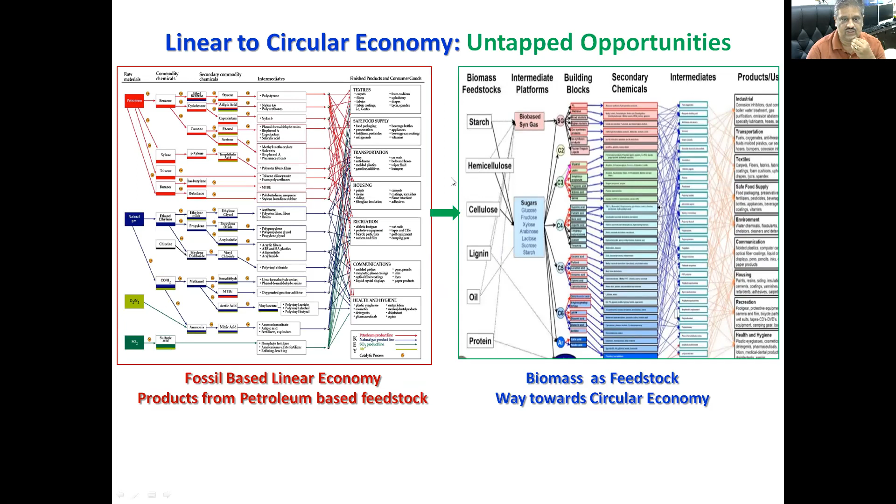Likewise, I would like to show this slide at the end: linear economy to circular economy is very important, and there are a lot of opportunities. This is the complex diagram which I have taken from US DOE, where all materials are being produced from fossils such as petroleum and natural gas. The same materials we can also produce by using biomass to a greater extent. So by using biomass or biowaste to produce these chemicals, we can retain the fossil resources for some more time for future generations. Apart from that, we can also reduce the climate emissions. So this is the significance of circular economy as well as bioeconomy, and this has significant potential.

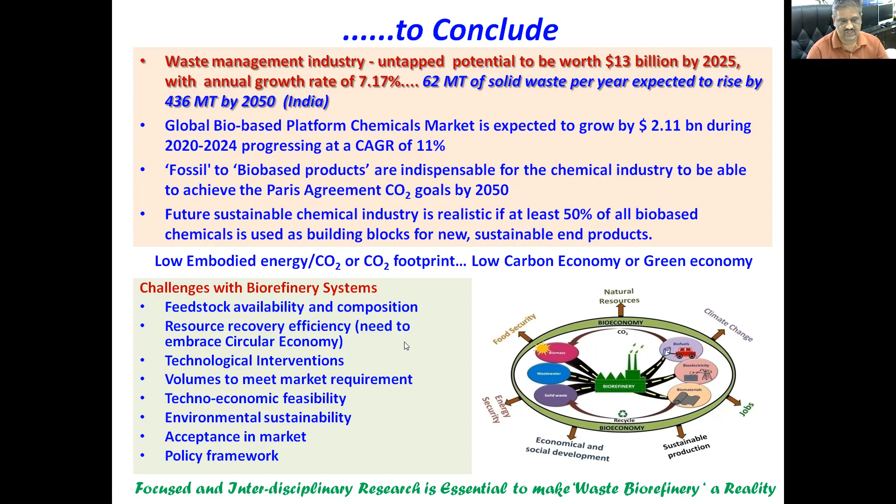Particularly in the Indian context, there is an annual growth rate of about 7%. So far it's not being considered as an industry, but it has a significant role to play. Now it is in a segregated mode, in segregated unorganized sectors, but it has a lot to do and also has a lot of challenges which need to be addressed. There is a very good scope for small scale and medium scale entrepreneurs to take up these kinds of strategies to support the circular economy and bioeconomy as well as renewable energy. And this requires a lot of focused interdisciplinary research, and also supports the majority of the sustainable development goals.